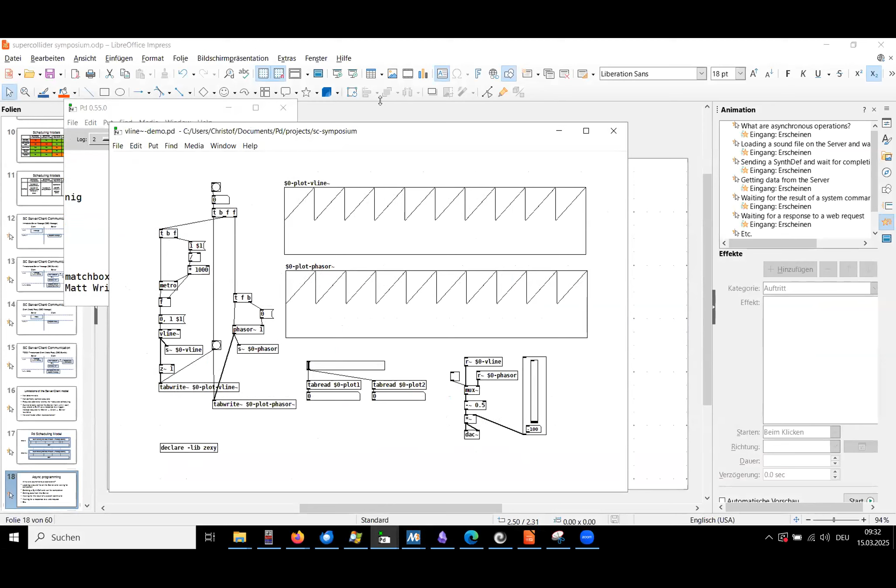I have some demos to make things exciting. Yeah, I always love demos. There was this really great joke about the NASCAR races. So let's see if PD crashes. I don't think so.

What I want to show is that we have this vline object. It's basically a line generator, and we have this metro object, which basically just creates a regular event. It sends a bang, and then the vline object can actually create a subsample accurate ramp. And here I have a comparison with a phasor object, which is an actual audio ramp generator.

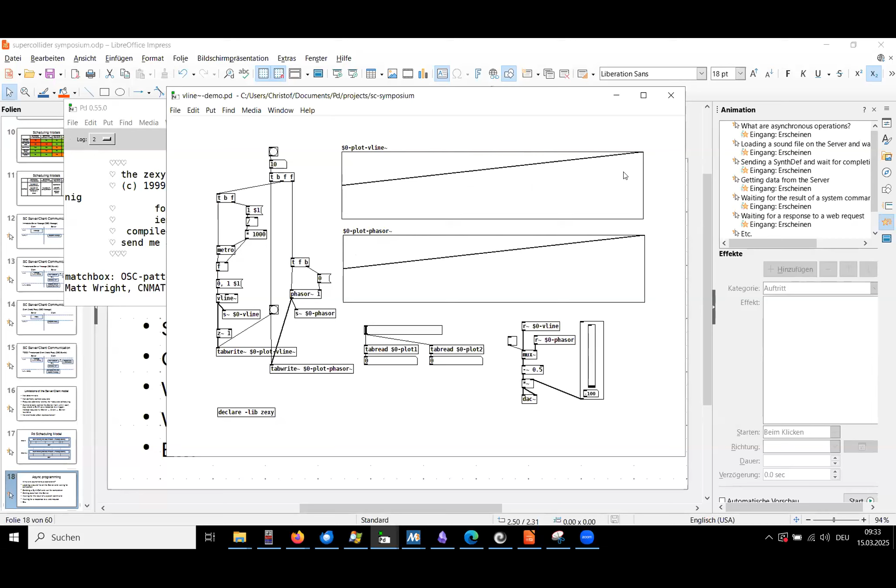For example, I have a table of 4,800 samples, and if I make a ramp over 10 milliseconds, you can see it's the same output. If I do 100, you see it's the same output.

Yesterday someone mentioned Stockhausen's essay about the passing of time, where there's a continuum between pulses in the control domain and the audio domain. And I think PD actually represents this continuum, because what I can do, for example, I have this 100 hertz sawtooth wave. And then I can actually listen to that.

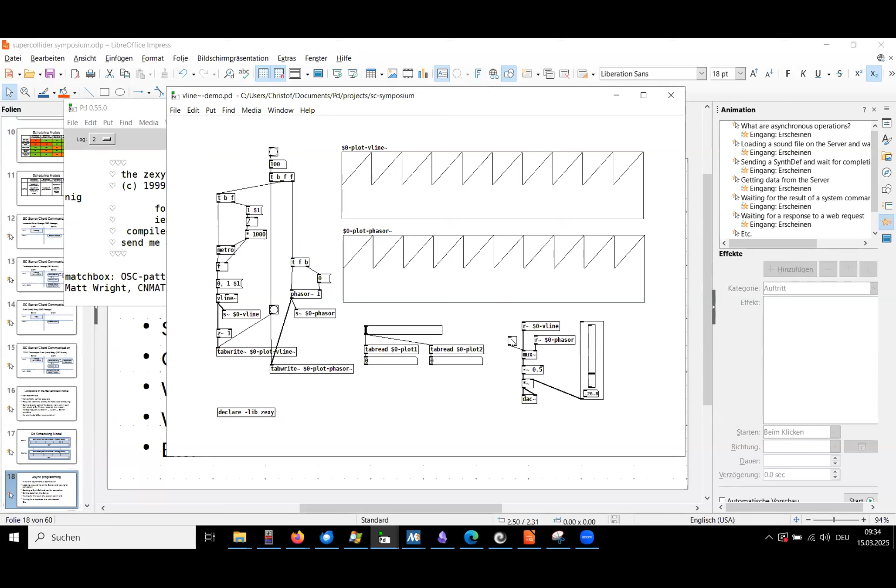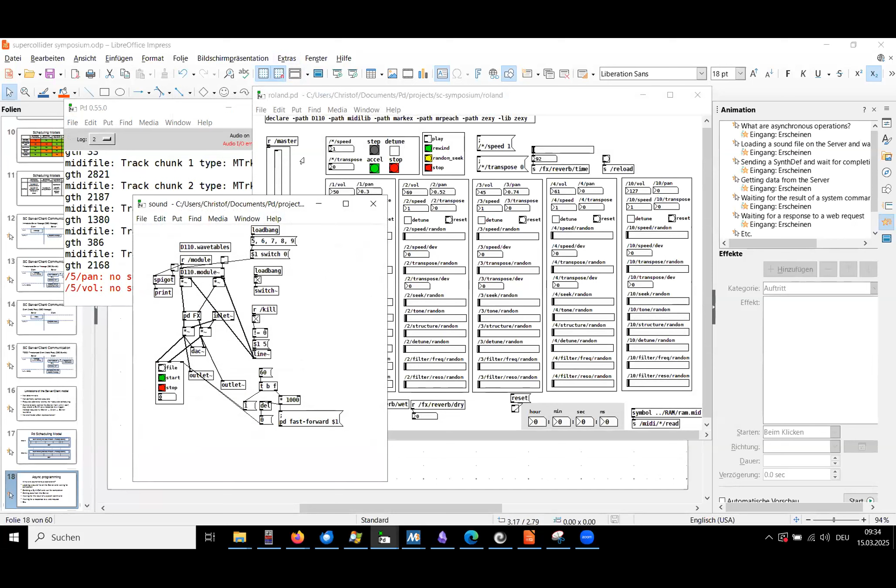And to give a very funny demo, it's a little patch I've been using. It's a MIDI file player. I wrote this little chiptune, and I can play it back on my Roland D-110 emulator and start that.

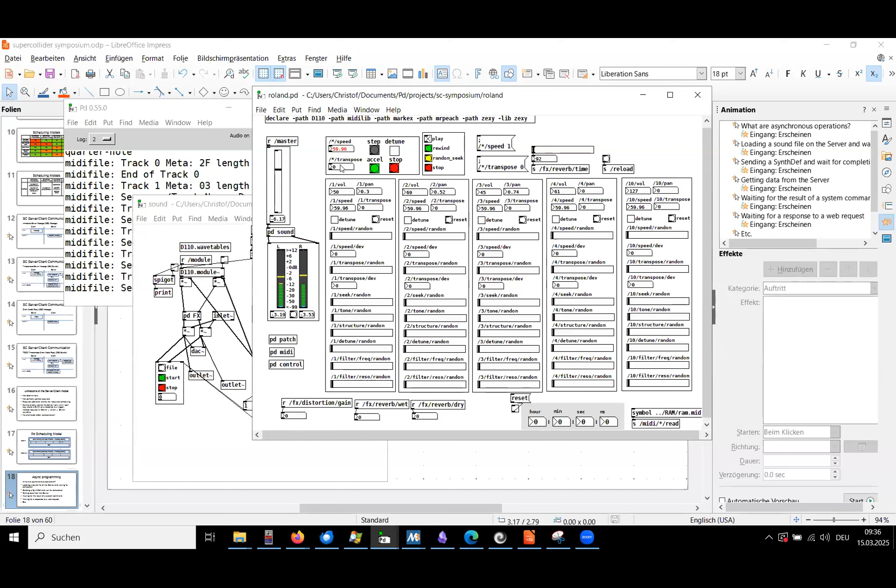Now I can... other things you can do in PD. Try that in SuperCollider. You would need to send like 10,000 messages in a second. So good luck with that. So yeah, there are certain things you can do in PD that you can't do in SuperCollider, and vice versa.

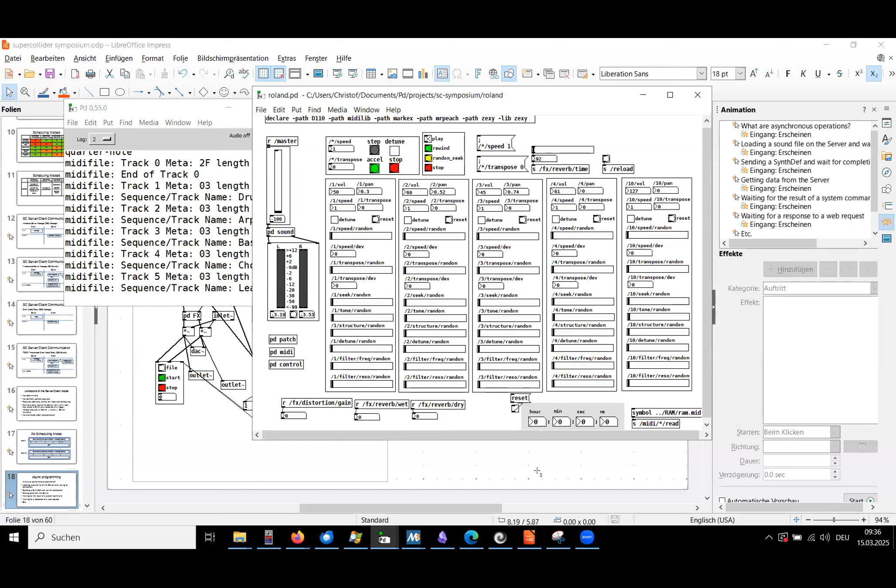So I will continue now. I have to look at the time. I'm not really sure how much... maybe I'll change the order. I will run through that maybe rather quickly so we have time for questions also. Well, I think I changed the order spontaneously. Yeah, because it's a pretty large thing. I will do non-real-time processing. I think I'll do that.

Non-real-time processing. Who of you does non-real-time processing in SuperCollider? Who uses it? Not so many. Of those who do, who are happy with the workflow? Great results. Yeah, the results are nice. Okay. They can be nice. So, what's the problem? Okay, so that's how you do it in PD. I think we should switch the order.

But in PD, what you actually do, you just run the same patch from the command line with the batch option, and you just have to make sure that you send a quit message in the batch after a certain amount of time, so the batch actually knows when it should close down. So you can use the exact same patch and render a non-real-time version. This works because of this synchronous scheduling model. Yeah, and it's kind of cool, I think.

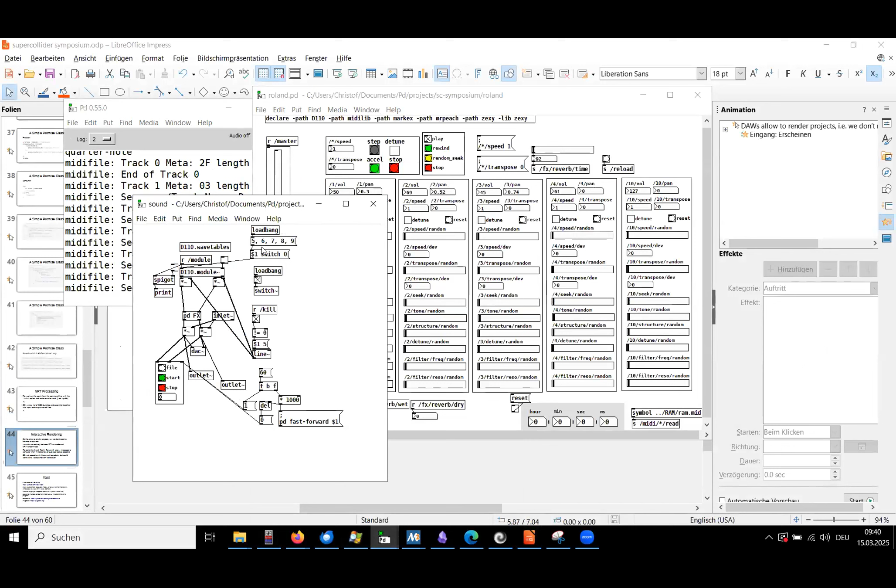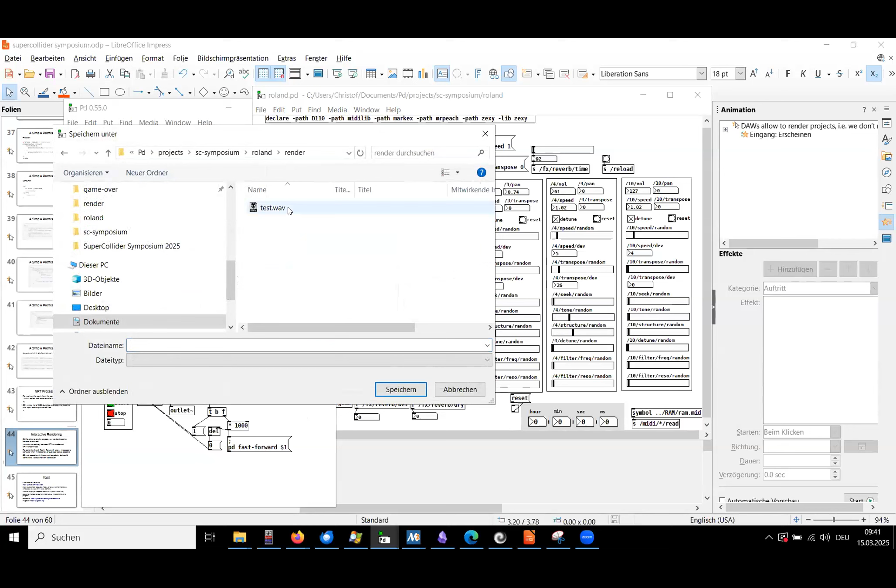I'll take this just for the giggles. I will just keep this patch up. That sound. I just want to render 1 minute of that sound. And the message says, okay, fast forward for 60 seconds. Recording, and after 60 seconds, stop recording. Count the seconds now: 1, 2, 3, 4, 5... Here's our file. It's exactly 1 minute long. And that's very, very useful in my opinion.

So yeah, so much for that, and I think I'm doing fine. There are 2 more things I want to talk about, and then we'll have some time for questions. I skipped a whole section, but I was just too optimistic. So okay.

libpd. So this is really nothing new. You can use Pure Data as a C library. This is the repo, and it runs everywhere, really, also on embedded devices, mobile, browser. It has lots of language wrappers, and it supports multiple concurrent instances, which is important for DAW plugins. And there are some plugin solutions for PD: there's Camomile, and there's also plugdata, which I've mentioned already.